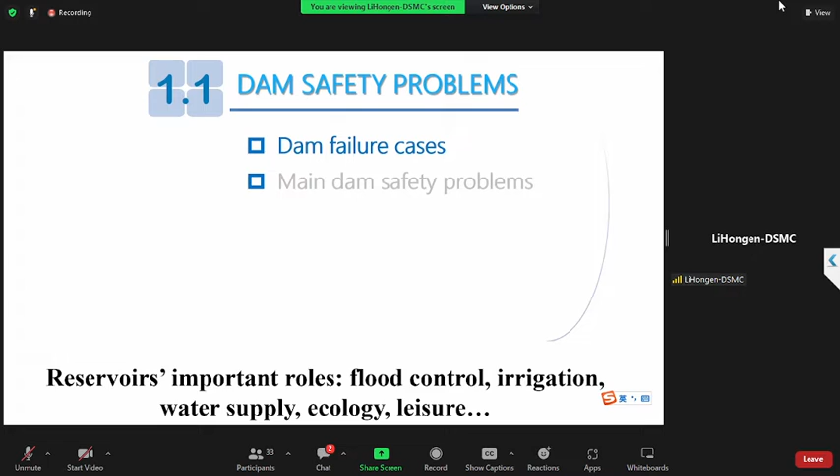We all know dams or reservoirs are very important for every country, for people, for economics. But when dam failure happens, it may lead to serious consequences. So in the first part, I'll show you some dam failure cases that happened in recent years. This slide shows you some functions of reservoirs in China and also worldwide. Reservoirs play very important roles in flood control, irrigation, water supply, ecology, and so forth. But sometimes when dam failure happens, the consequences are serious.

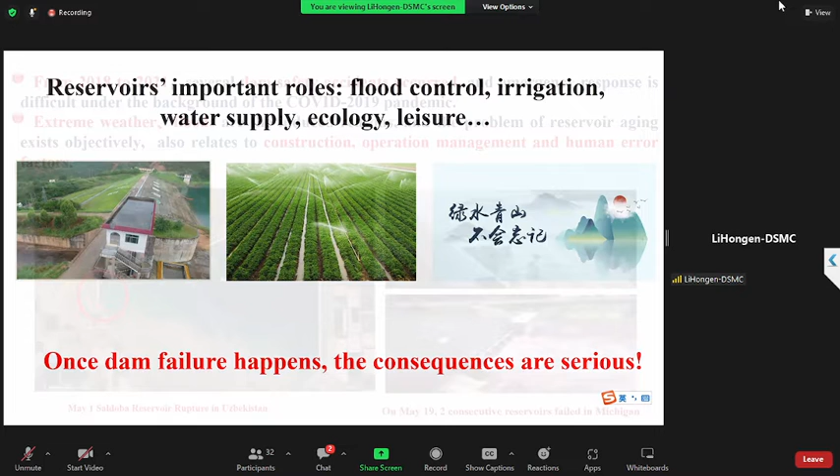From the year 2018 up to today, several dam safety accidents happened, and the emergency response is difficult under the background of this pandemic. Extreme weather, climate change, floods, and rainstorms are the induced reasons. And the problem of reservoir aging exists objectively, also related to some other reasons, such as construction quality, operation management error, and human error factors.

The first one I want to show you is, sorry, this case. This case happened on Hawaii island in the Pacific. This dam's name is Kaupakalua, failed by overtopping on March the 8th, 2021. According to the local media, 2 people were lost in the flood that day. One of them was rescued. The character of this failure case is that the dam is very old. It was built in 1885, and it is 17.4 meters high and 122 meters long. The residents downstream of the dam have been warned to evacuate.

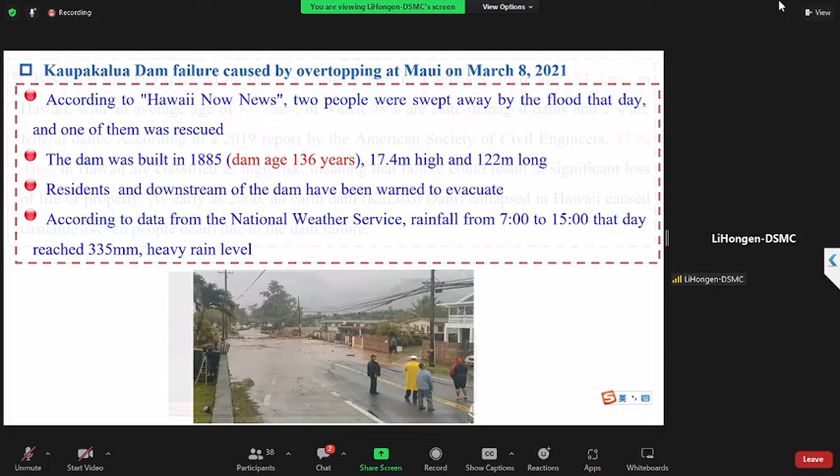According to the 2019 report by the American Society of Civil Engineers, 93% of dams in Hawaii are classified as high risk, meaning that failure could result in significant loss of life or property. And earlier, in 2006, another dam, Kaloko Dam, collapsed in Hawaii and caused casualties. 7 people died due to the dam failure. So we can see dam failure may cause people to die and cause a lot of influence to the local area.

Another case happened in India. The rupture of the Nanda Devi Glacier in the Indian Himalaya led to a dam failure on February the 7th, 2021. And more than 150 people died or disappeared during this accident.

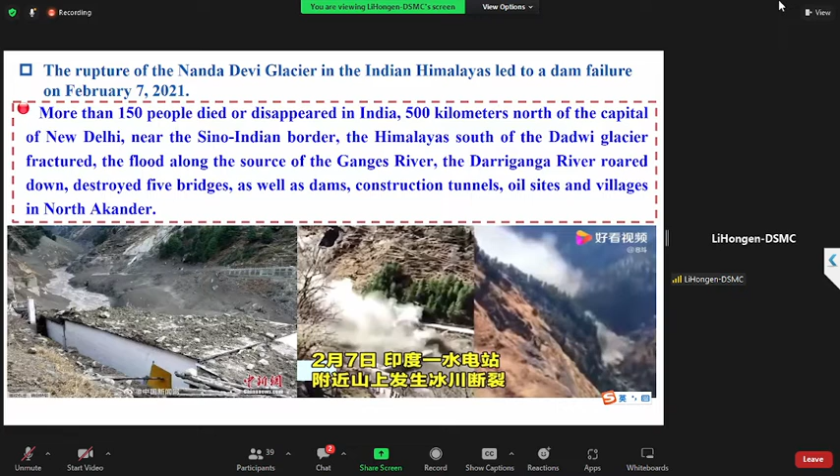Clearly, this dam failure case was caused by the climate change problem. So we check some background information. We know this is a neighborhood of China, the Himalaya area, and in this area flooding and landslides are prone to occur. In 2013, devastating floods occurred and led to more than 6,000 casualties. It's very terrible.

Another case happened in Uzbekistan in 2020, May the 1st. This reservoir's name is Sardoba. Maybe you heard of this accident. The dam is about 29 meters high and has a storage capacity of 920 million cubic meters. It's a very large reservoir. Based on the Chinese standards, it is a large 2 type reservoir.

Construction was completed in 2017. You see, it's a really young dam, very new. It completed construction in 2017, and 3 years later, it collapsed. The functions of the dam are irrigation and power generation. Clearly, the main function of this dam is to store as much water as possible.

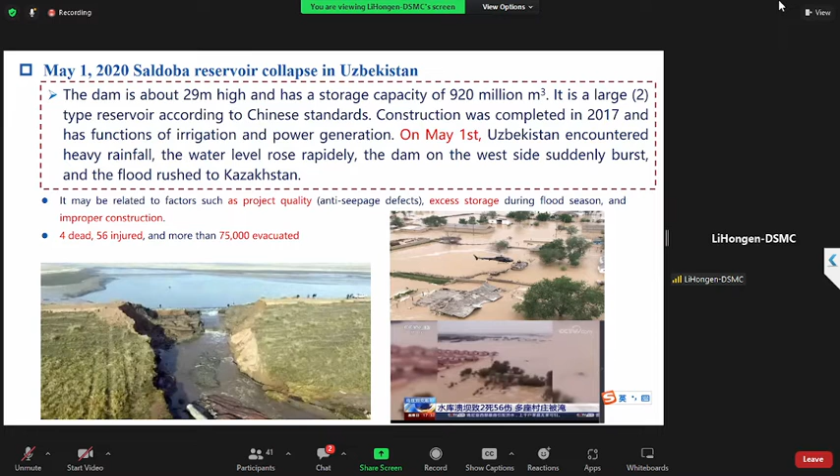This slide shows you some pictures from the dam failure site. You see the president arrived at the area rapidly. So you know this dam failure is very serious. Then I'll show you a short video to illustrate what happened when the seepage problem caused the dam failure.

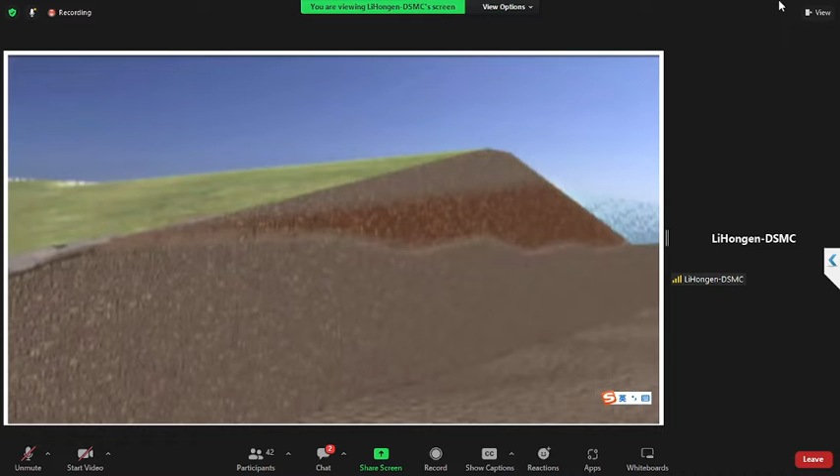One degree or another. While the dam experiencing seepage may appear in sound condition, there may be damage occurring to the internal structure of the dam. If seepage flow rates appear to be increasing and the flow is not clear and is carrying material, internal erosion or piping is likely occurring. Piping is an erosion process that occurs inside the dam whenever the seepage flow starts eroding embankment materials out of and away from the dam.

This starts at the downstream slope or toe and moves rapidly upstream to the impoundment. This process will tend to accelerate as the expanding larger opening or pipe allows for increased seepage flows. If left unattended, the seepage flow and progressive internal erosion will soon get out of control. When the internal pipe or void becomes large enough, the embankment structure above it will collapse. This will result in a failure of the dam's embankment and a potentially catastrophic release of the stored water, which may cause serious property damage and loss of life.

Okay, this video shows you the main process of dam failure caused by the seepage problem. So in the later part, we'll discuss some monitoring technologies for monitoring the seepage.

Next case is the Edenville and Sanford Dam failure in Michigan, United States in 2020. These 2 dams are also very old, built in 1924 on the mainstream of the Tittabawassee River. They are made for power generation and tourism. That day, due to continuous rainfall, the Edenville Dam in Michigan first collapsed, and then the floodwater washed away.

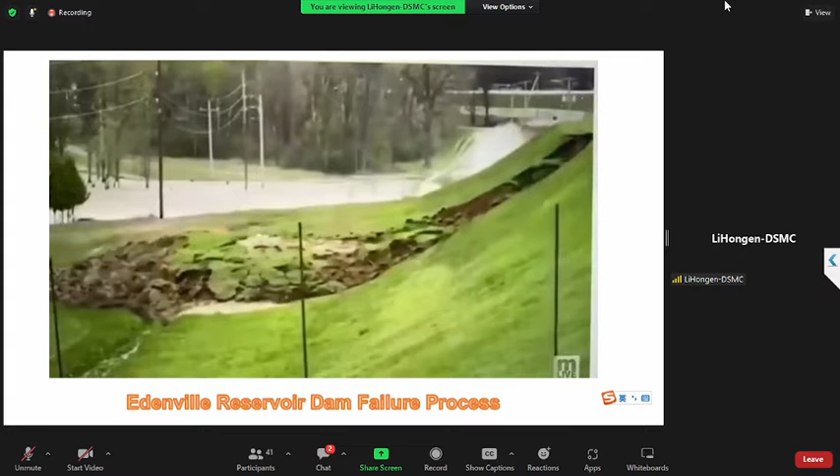So we check the files released by the local government. In 2018, the owner of the dam, Boyce Hydro, was suspended by the FERC and banned from generating electricity after the Edenville Dam was assessed as a high-risk dam due to its long-standing failure to solve the problem that we have mentioned, the inadequate spillway discharge capacity problem.

So the government asked the owner to realize the reservoir requirement that the discharge capacity should meet the PMF, probable maximum flood, but the actual discharge capacity was only 50% of this requirement. Interesting information is that when this problem was found, it was 1999, almost 20 years ago. However, nobody paid enough money or made enough assessment to fix this problem, and finally the dam collapsed. So every owner of a reservoir should pay attention to the maintenance of dams or reservoirs.

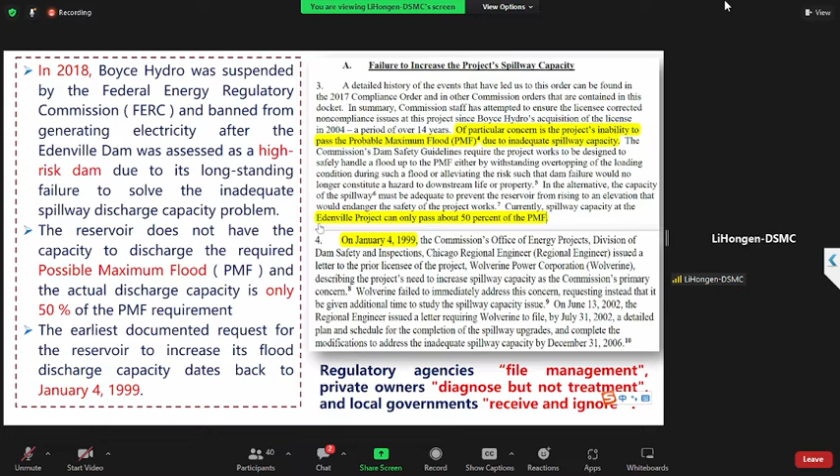But in this case, we have some lessons learned. Because of the better emergency response system in this area, rainfall forecast, and dam failure warning, nobody died. No casualties happened in this dam failure. So we know a good monitoring system and warning system is very important for dam safety management.

And then another case is this one, the Toddbrook Reservoir spillway accident in the United Kingdom, which happened in 2019. This is also a very old dam. Its age is nearly 180 years, and this dam is approximately 24 meters high. Also, heavy rainfall happened, and the water level rose sharply by 100 to 300 millimeters. On August the 1st, 2019, the auxiliary spillway of this dam was severely damaged due to heavy rain.

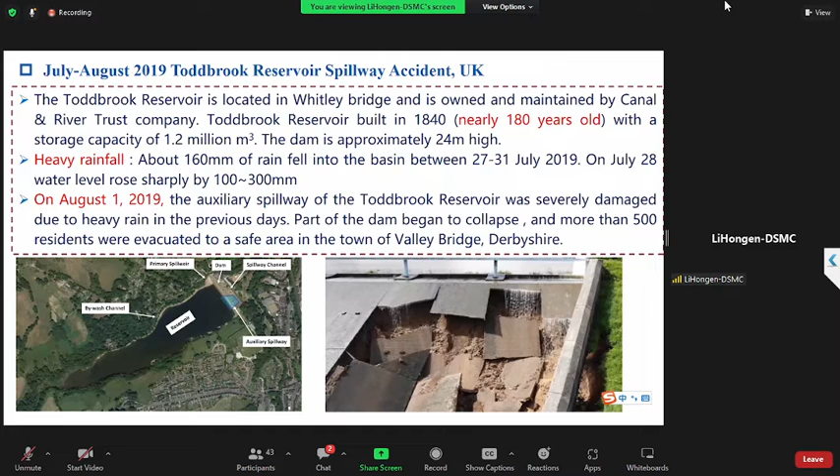Due to the emergency, the dam owner carried out several measures to lower the emergency. One is to use an emergency pumping operation. It effectively alleviates the impact of heavy rainfall on the dam. And the British Air Force helicopters dropped 1-ton sandbags at the spillway site, dropping a total of 530 tons of sand, and the ground personnel solidified these sandbags with concrete.

Some factors led to this accident. One is the design problem. You know, it's a very old dam, so the spillway is poorly designed and not strong enough to discharge the maximum possible flood. Another reason is management issues, like poor supervision, failure to reinforce in a timely manner, and some other maintenance work errors.

Another case is also a very famous dam incident. It's the Oroville Dam incident, a spillway problem, which happened in 2017. This dam is very important for the local area. It's the tallest dam in the United States, and it's very important for the local water supply. Due to the rain and the snow, the water level rose rapidly, and the owner used the spillway first, but a huge collapse area appeared in the spillway. The owner had to use the emergency spillway, which caused a lot of problems.

Dams are designed to store runoff resulting from heavy rain. When storage has reached a specific limit, spillways are designed to pass the excess floodwaters, initially through a primary spillway. Many dams are equipped with an emergency spillway to help pass large flood inflows which exceed the capacity of the primary spillway. In an extreme flood, flows can exceed the combined spillway capacity, spill over the top of the dam, and create a very dangerous situation. Overtopping flood flows can rapidly erode down into an earthen embankment dam, leading to an uncontrolled release of the stored waters and causing catastrophic flooding downstream.

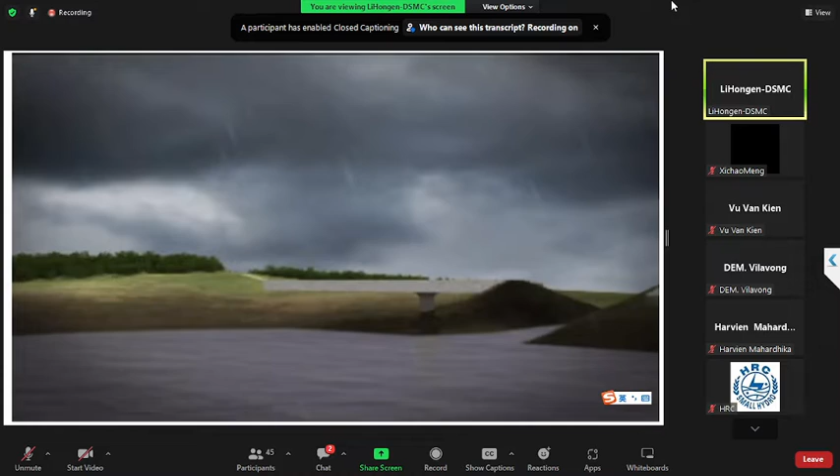Okay. The last dam failure case I want to show you is the Xe-Pian dam failure, which happened in 2018, and with this dam, people went missing and 9 people died. This dam failure happened on July the 25th, 2018. The dam collapsed, and 13 administrative villages were directly influenced or had to be evacuated to safe places.

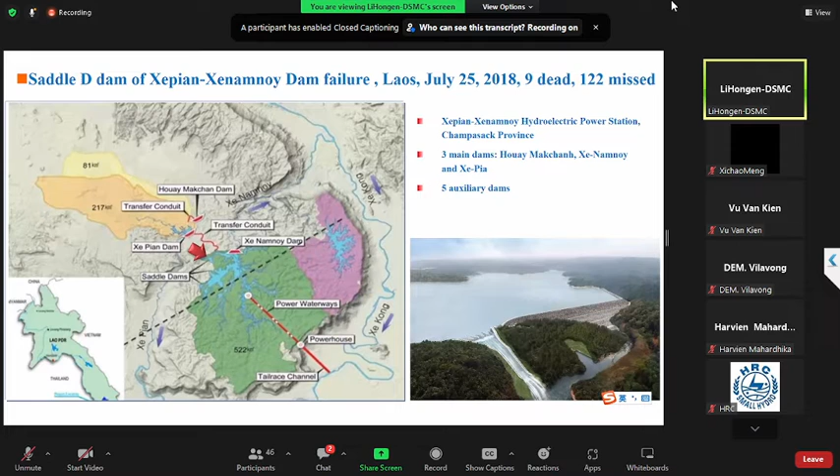And we checked some information about this dam failure. The owner of this dam is a Korean company, PNPC. On the 23rd of July 2018, they made an announcement to the downstream that over 5,000 million tons of water would flow out to the downstream of this river.

This day is 2 days before the disaster happened, but the local government didn't pay enough attention to this announcement, and no people were transferred to a safe area. So after the dam failure happened, a lot of people died. So this dam failure case tells us the warning of dam safety is very important to the public.

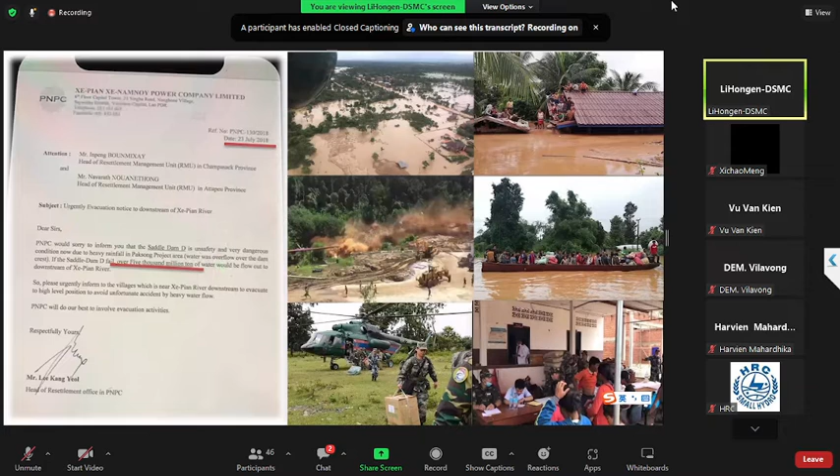After this dam failure happened, ICOLD, the International Commission on Large Dams, rapidly released a statement to the public. They told us dams are critical pieces of not only physical but also socioeconomic infrastructure that supply different functions. So like other large infrastructure in our societies, dams provide critical services, but also pose high risks that must be addressed during the planning, design, and construction phases.

The precautionary principle of dams to prevent and mitigate adverse downstream safety consequences informs and is the heart of this commission's mission, and also the mission of dam owners and local government. So we have discussed a lot of dam failure cases. Then we make a short summary of what the main dam safety problems are.

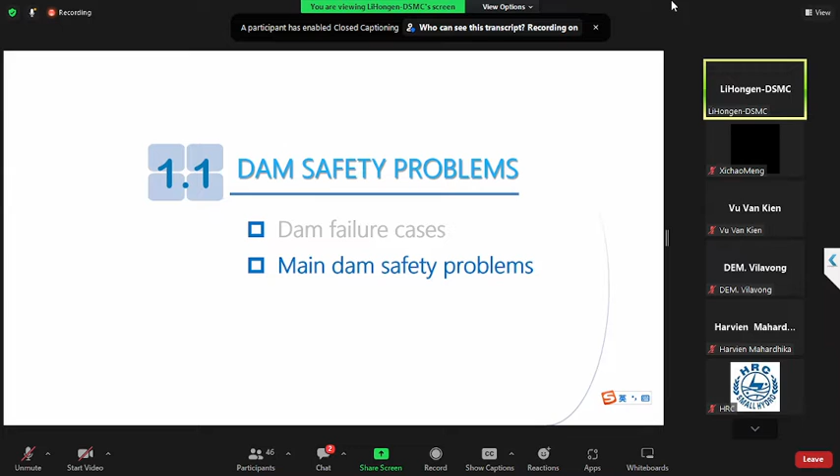Normally, I want to take the rockfill dam, for example. For this kind of dam, the first dam safety problem is the flood prevention problem. We know most of us build a reservoir to realize the flood control function. So like the Edenville Dam, like other dam failures, this problem has several characteristics.

One is because of insufficient rainfall, flood or river data, unreasonable design of flood standard sometimes happens. Second, encountering over-standard floods due to rainstorms, due to climate change. And then some rivers may face sedimentation problems, and this problem may lead to severe reduction in flood storage capacity.

The second problem is the seepage problem. Seepage is another very important reason. This problem may happen in the dam body or the foundation, and also may happen on the interface between dam body, foundation, and concrete structures like conduits, like spillways, and some seepage problems happen on the abutment.

And then the third problem is structural problems. This kind of problem can be summarized as dam cracks, partial collapse, dam body slide, abutment instability, dam foundation liquefaction induced by earthquake, and termites and other animal hazards. This is also a very important problem for rockfill dams. Okay.

Until now, we have discussed a lot of dam failures and dam problems. So how to monitor dam safety status by proper methods? Here, we'll discuss a lot about this in this section. So the purpose of dam safety monitoring can be summarized as during the construction period, the operation period, and for scientific research.

So first, during the construction period, monitoring data can be used to check the reliability of the design and the quality of construction, and hence revise the design or change the construction scheme if necessary. This slide shows you some dam sites under construction.

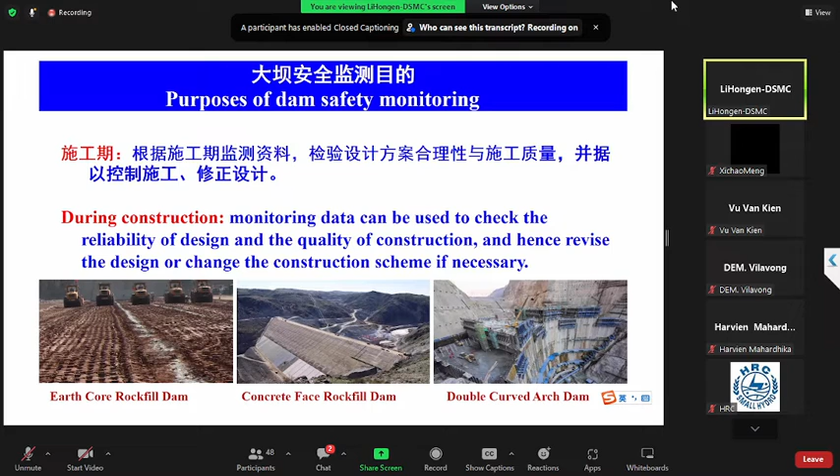During the operation period, the first-hand monitoring data can be used to analyze the safety status of dams and their potential risks. Measures can then be employed to ensure the long-term safety of dams if necessary. So dam safety monitoring technologies are very important during the operation period, especially for very large, important reservoirs.

And finally, for scientific research purposes, dam monitoring data provide the most valuable and reliable basis for the verification and improvement of theories in dam engineering. Imagine a real project like a 1:1 scale experiment, right? Its data is very important for the development of dam design and construction technologies.

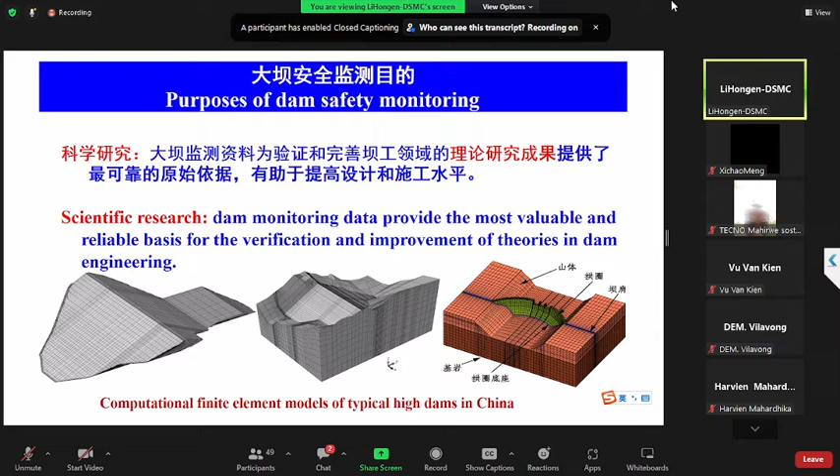So in China, there are rigorous requirements in dam safety monitoring by the Chinese government. We have different kinds of technical specifications for different types of dams, especially for rockfill dams, for concrete dams, and also for the monitoring system, how to realize this kind of system.

So we have finished the first section, the purpose of dam safety monitoring, and then let's discuss a little bit about technologies of dam safety monitoring. First, I want to show you the characteristics of dam monitoring. We know dam safety monitoring includes dams, their foundations, abutments, and near-dam slopes, and they all have a major impact on dam safety, and other buildings and equipment that are directly related to dam safety.

All these objects should be monitored. Its characteristics are expressed in the following aspects. It's a life cycle problem. We mean during the construction period, the operation period, and also the retirement period, we need dam safety monitoring. It's a dynamic and not static process. It also involves relevant items. It covers a very great range. That means not only the dam itself, but also the facilities and structures related to the dam.

So I'll show you the load diagram of a certain gravity dam. We know there are different kinds of loads, and to these loads the dam should have some response: pressure, seepage, uplift pressure and sediment pressure. When an earthquake happens, there is an inertia response. All these responses we should monitor. But different dams have different requirements.

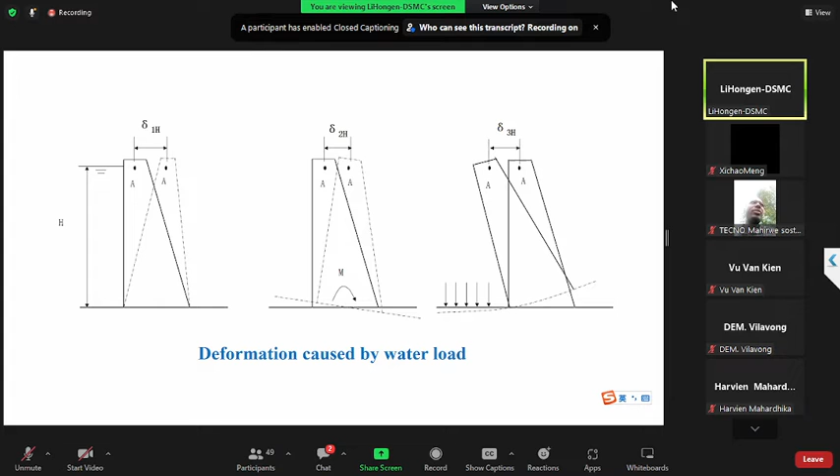So several common concepts, like detection. Detection normally means short term. Monitoring means long term. Observation means surface artificial methods. And monitoring and controlling means we monitor the data, realize the analysis, and then feed back to the decision.

And health monitoring means structure and damage diagnosis, detection, risk analysis for the structure, for the probability of the failure and also the consequences of the failure. We multiply these two factors to realize the risk analysis. And another concept is the safety assessment. This means we should evaluate the safety status of a dam.

And back analysis means we use monitoring data to carry out the back analysis and to calibrate the material parameters. And we use these parameters to make another analysis and then to evaluate the safety status. It's a bit of a complicated process.

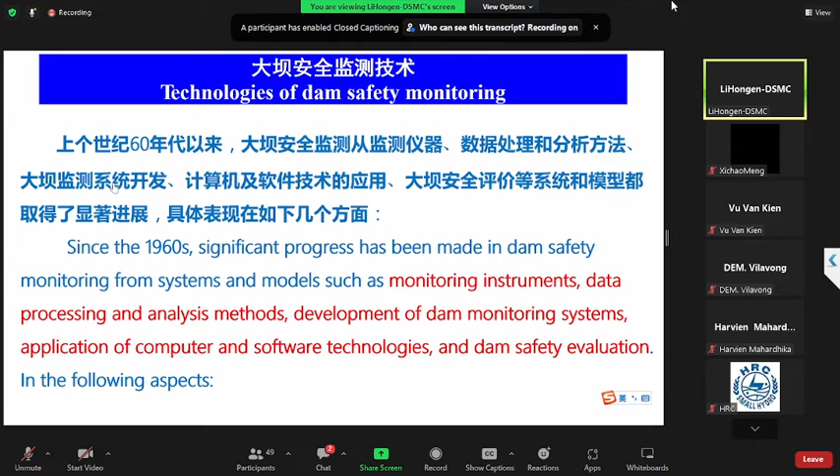The first one is sensors, different kinds of monitoring instruments. After we finish the placement of instruments on the dam body, we have to gather the data. So the second one is the data acquisition system. And then we have a dramatic amount of data to analyze, so we need an information management system. And finally, we should have mathematical methods, like different kinds of data analysis methods. So these 4 parts are the very basic aspects of dam safety monitoring technologies.

Okay. So the first part is monitoring instruments. Normally, when we talk about monitoring items, we have different aspects. The first one is manual inspection, and then deformation, seepage, stress strain, temperature, environmental quantity, and others. Manual inspections also need instruments, very simple instruments such as rulers. But this is very important, especially during the emergency period of flood season. Manual inspection is very, very important.

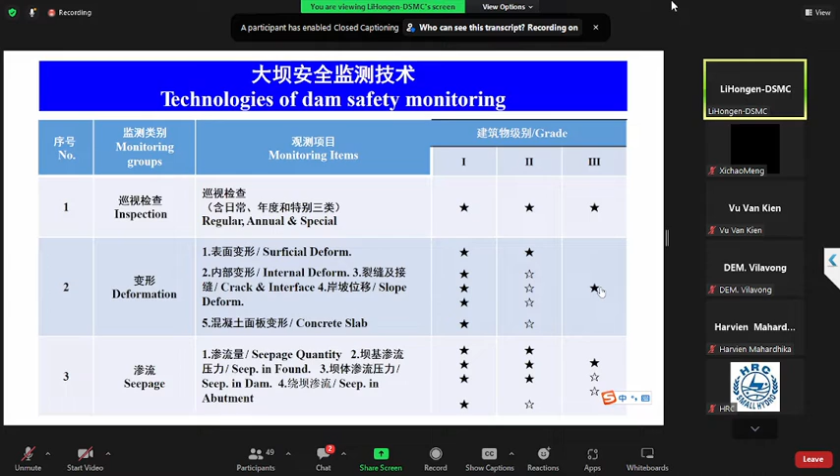For pressure and stress, we have pore pressure, earth pressure, contact pressure, and concrete slab. And for hydrology and meteorology, reservoir level is very important. Precipitation, rainstorm, rainfall very important. Others like water temperature and reservoir wave are less used. But sediment is very important. Ice is very important for some dams and reservoirs located in the north. Earthquake is also very important.

So for manual inspection, we have some requirements. For personnel requirements, the engineers carrying out the manual inspection should be trained properly. They should have sufficient experience. Relatively fixed people; you cannot change to different people to do this. For monitoring data requirements, we should record properly and contrast results from different times. For route requirements, there should be successive and reasonable routes. For time requirements, it should be planned and consistent. And the last one is the requirement for results processing and inspection.

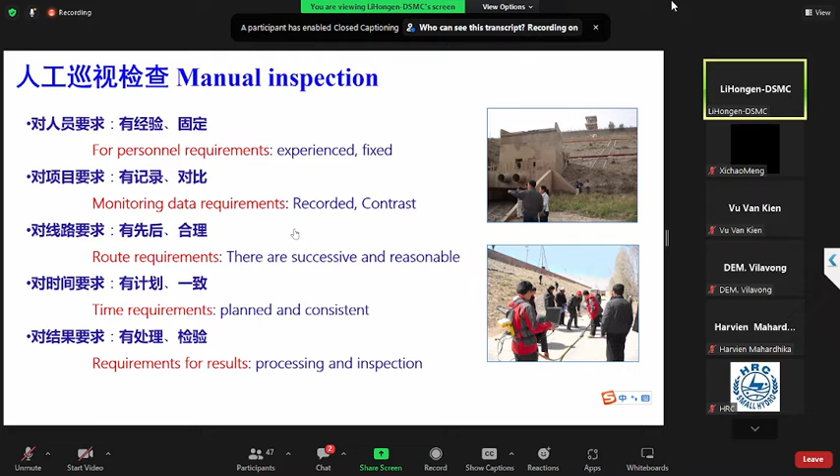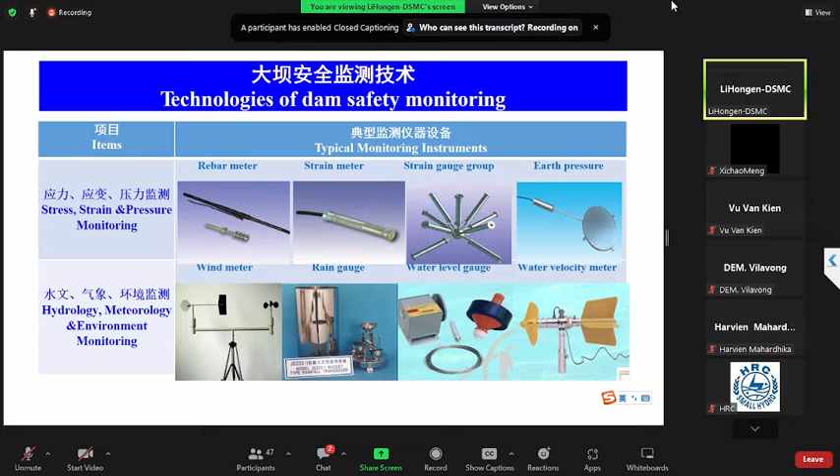And for the environmental monitoring, we have different kinds of meters for wind, for rainfall, and water velocity meter for water velocity. So let's discuss a little bit in detail on the environmental monitoring. For water level, the manual reading can be done with the water level gauge, or different types of water level gauge can be used for automatic measurements.

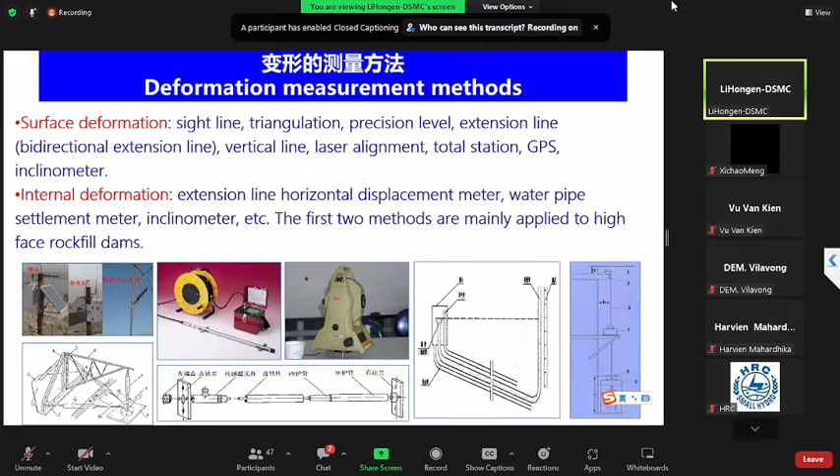And for deformation measurement methods, for surface deformation, we have sightline, triangulation, precision level, extension line, vertical line, laser alignment, total station, GPS or GNSS, implementing different kinds of technologies. And for internal deformation, we also have these kinds of meters. So the extension line horizontal displacement meter and water pipe settlement meter are mainly applied to very high rockfill dams, or concrete face rockfill dams.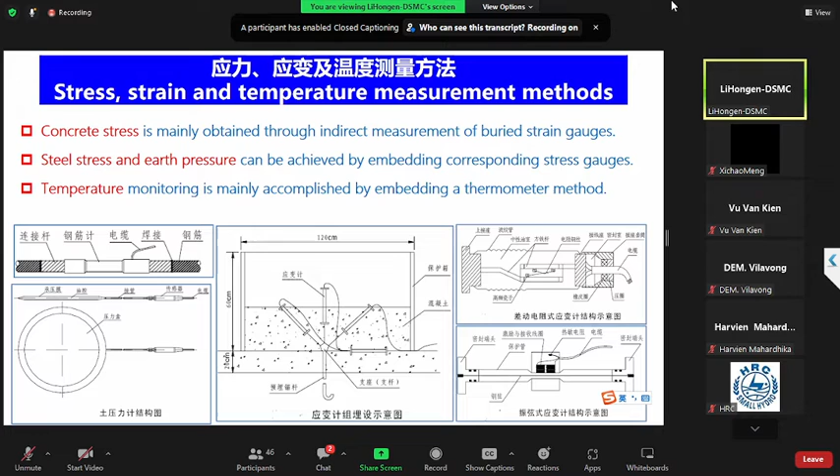And then for stress, strain, and temperature measurement methods, we normally use different strain or stress gauges to realize concrete stress, steel stress, and earth pressure monitoring. Normally during the construction period, these are very important. Especially, temperature monitoring is very important for concrete dams. Proper controlling measures should be made to lower the probability of cracks in concrete dams. This is very important.

And others mainly discuss earthquake and hydraulics. We know an earthquake is a sudden load on the dam body, so we should know the response of the dam. This is very important. We have proper sensors. And hydraulics means we should know the flow state, especially on the spillway. Just now we discussed the Oroville incident. We should know the flow rate and the surface line and erosion, vibration. This also can be monitored by proper methods and instruments.

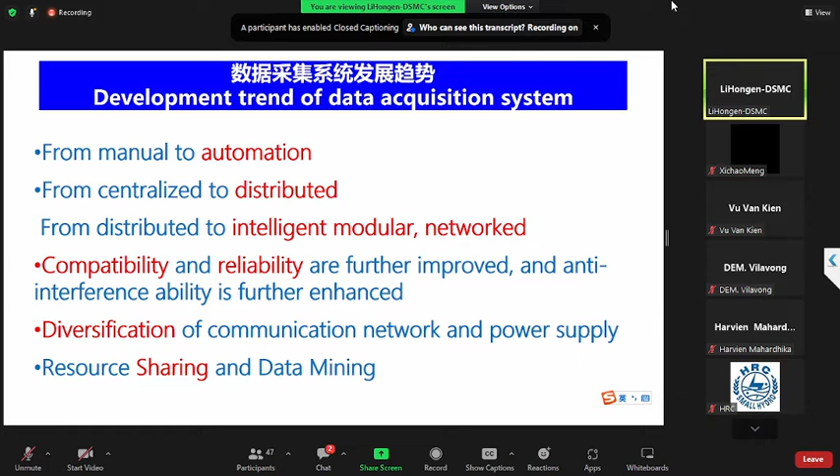Okay, and the second part is the data acquisition system. This is also very important. The development trend of data acquisition systems right now is from manual to automation. Clearly, most of them right now realize data acquisition automatically, and from centralized to distributed, from distributed to intelligent modular, networked, and also compatibility and reliability are very important for this kind of system. Diversification of communication network and power supply, and resource sharing and data mining are also very important.

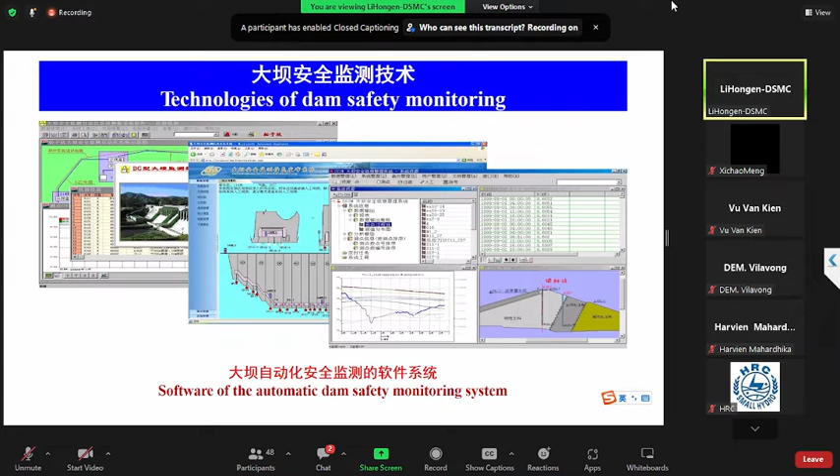And the third one is the information management system. In this system, right now we have data from the dam body, and we need to produce a lot of tables and time curves. We should use this kind of system. I'll show you a diagram. This is one diagram of this kind of system, and then we also use data analysis methods.

Clearly, for most of them we need some background in mathematics. So general interpolation, statistical theory and mathematical morphology are needed to realize the error analysis first, and then we have to use data modeling. So we need general probability and statistical models, deterministic and mixed models, GM models, and also others. Right now, the BP model is very popular, and neural networks are very popular for data analysis. Finally, sometimes we use different kinds in series, which means combination models.

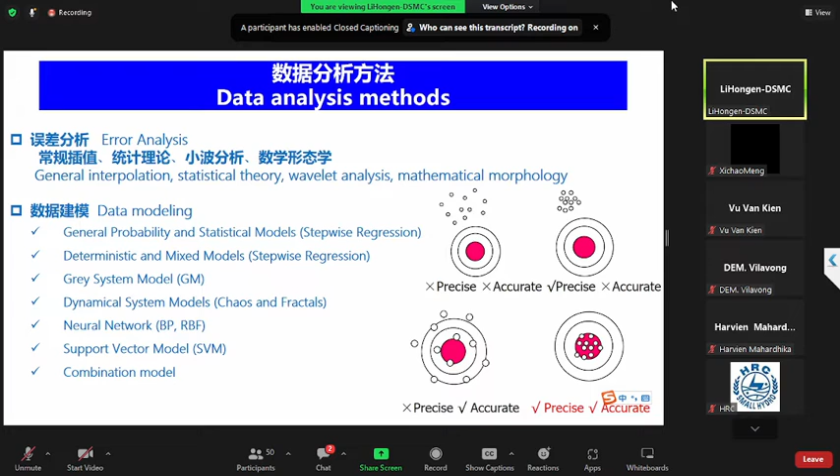Based on these models, we should know physical laws, yield criteria, and monitoring indicators. Also, trend analysis, correlation analysis, and component analysis are very important for dam safety monitoring. So this slide shows you a time curve of precipitation, rainfall, and temperature.

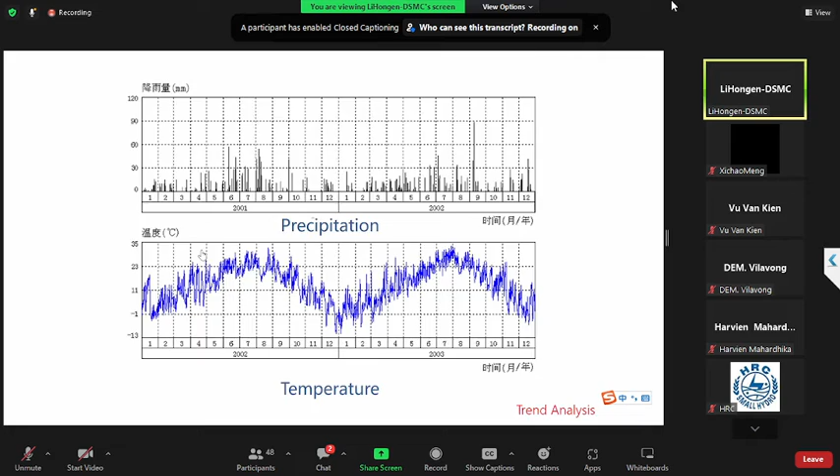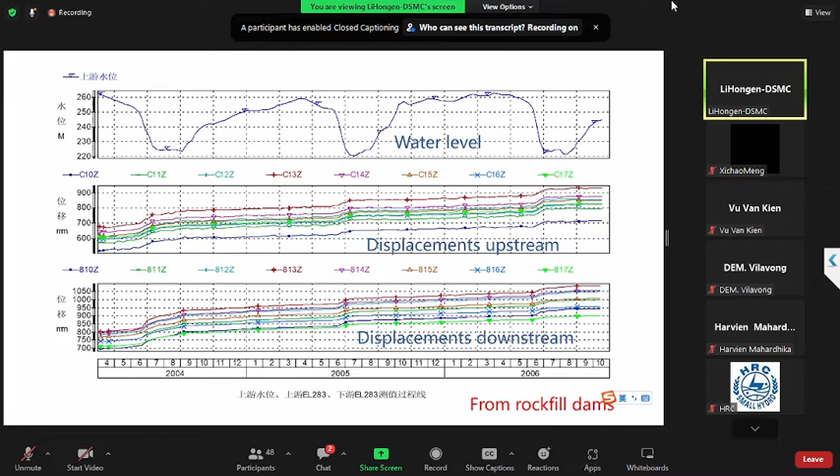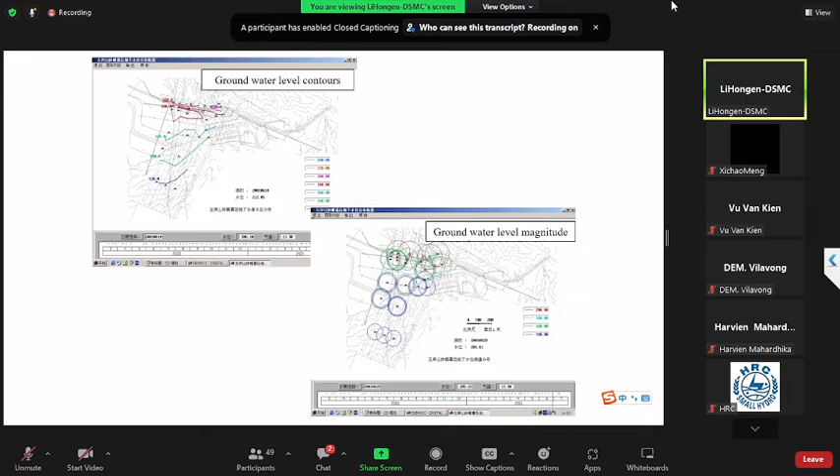Also, based on this system, we can realize contours, like groundwater level contours, and the groundwater level magnitude can be drawn in this system. Also, sediment distributions and sediment contours can be drawn automatically.

So we have discussed a lot of monitoring technologies, and in the last part we discuss a little bit of extra methods, like geophysical detecting methods for dam safety and reservoir management. I think other experts may show you this slide. Right now, there are almost 100,000 reservoirs in China, and most of them are old dams. Some of them have low construction standards and poor engineering quality. So risk and security problems are prominent, and flood control security is very important for us Chinese reservoir owners.

So just now I discussed the main different kinds of problems with dams. The most important one for rockfill dams is the seepage problem. This slide shows you dam foundation leakage, contact leakage, and detour leakage. So, typical safety hazards of seepage in earth dams, we have discussed a little bit, and how to detect them by detection methods, I'll show you on this slide. On the left part, we have discussed the safety monitoring instruments, but we also have detection methods like seismic, temperature, and sound electrical methods.

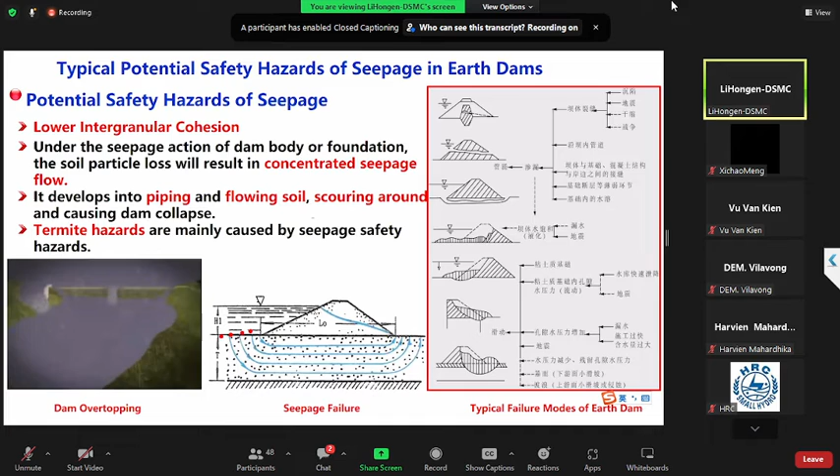Clearly, the direct inspection is the direct way. We have dry ground detection, with high accuracy, but this kind of method has a clear disadvantage: high cost, high impact, time consuming, labor intensive, and some reservoirs are not allowed to be emptied, especially for water supply. Then we have diver inspection. It also has high precision, flexibility, and a wide application range. But the disadvantages are that diving depth is less than 60 meters, with high labor intensity, limited working time, and a certain risk.

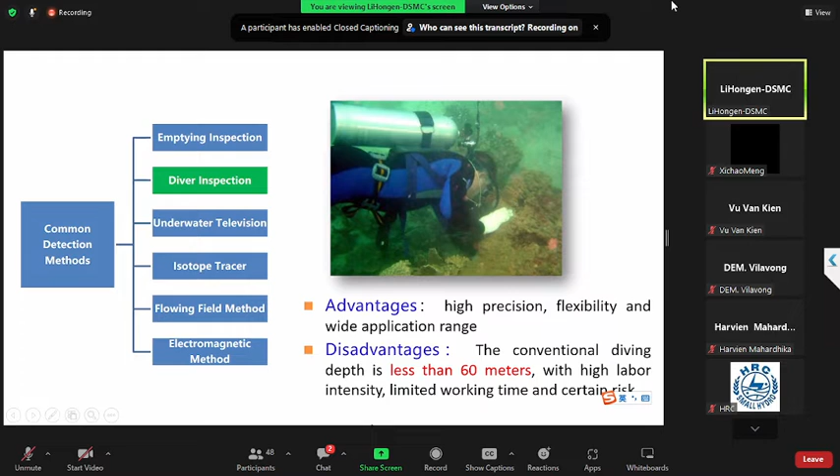And so for recent technologies, right now we have different kinds of machines, like this underwater television. Clearly, it's much more flexible and easy to operate. But the disadvantage is that only structure surface defects can be checked, not the leakage velocity. Then we have isotope tracer. This kind tracks the leakage point and the leakage passage accurately. Environmental pollution and drilling damage of the dam structure are its disadvantages.

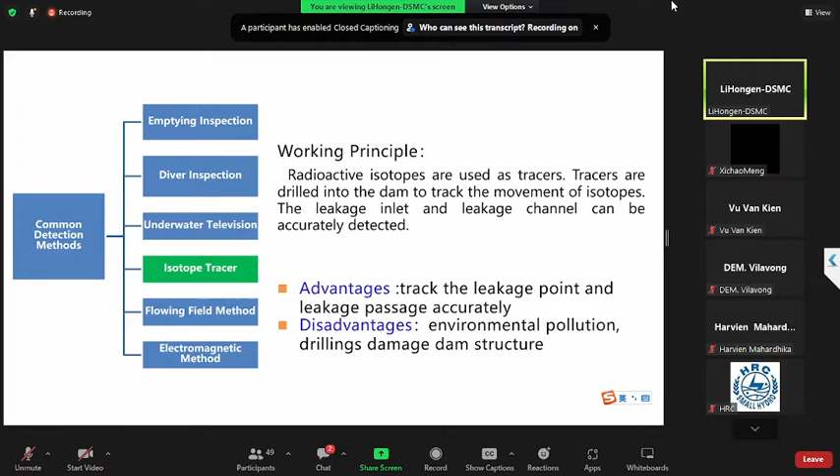And the flowing field method: its advantages are high resolution and strong anti-interference ability, but its disadvantage is it is only suitable for dikes or homogeneous earth dams and has fewer success cases for composite dams. And last is the electromagnetic method. There are a lot of methods in this area. It's low cost, high resolution, high efficiency, and easy operation. But the disadvantages are large signal intensity attenuation and limited measurement depth. So new breakthroughs in leakage detection technologies are urgently needed.

We have discussed two sections, and the last two sections are cases and advancement.

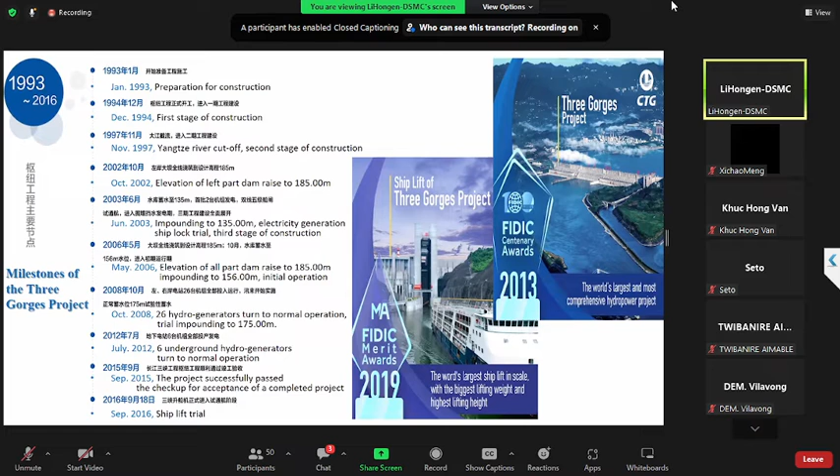This picture I photographed several years ago from the upstream of the reservoir, and this is another side view of this dam. I want to show you the case that is a part of the monitoring system. That is the ship lock, the Three Gorges permanent ship lock monitoring system.

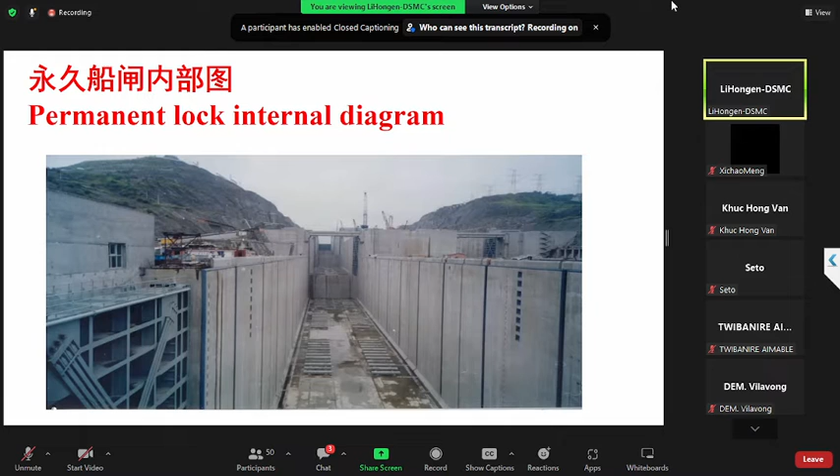What we have done, we see the permanent lock internal diagram. These are some pictures. It has five levels, five sections of this whole ship lock. So we installed a lot of measurement controlling units to collect the data from lots of sensors, and also this picture shows you the MCU installed in the permanent ship lock of the project.

And these cables connect a lot of sensors, such as deformation, seepage, and other kinds of stress, temperature, different kinds of sensors.

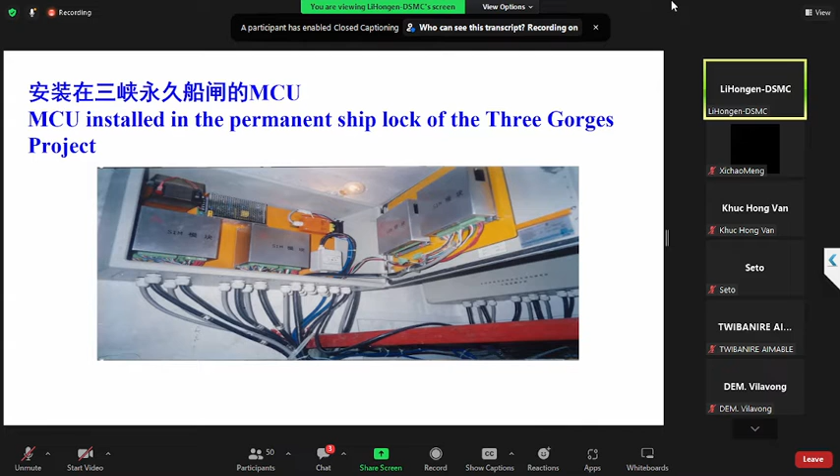The second case is the Gezhouba Erjiang sluice gate. It is believed that it's China's first distributed dam safety automatic monitoring system. Clearly, it's old. It's like the 1990s we installed this system on this dam. And another one is the Chencun Dam. It's also this case. It's a little bit old, 1990s.

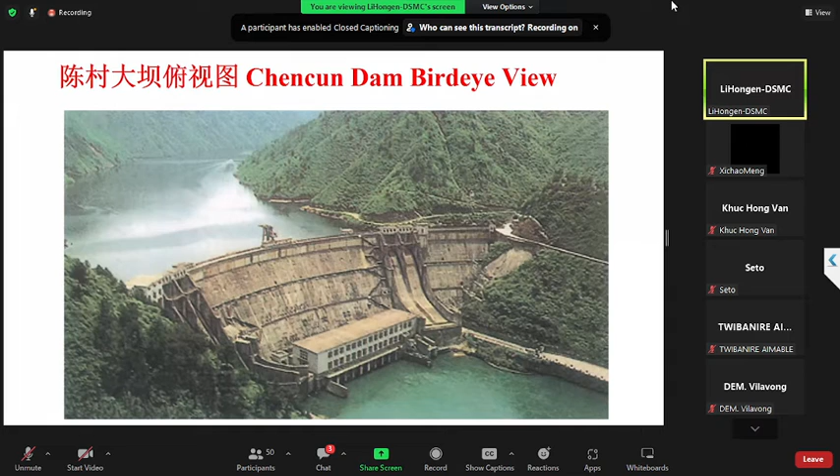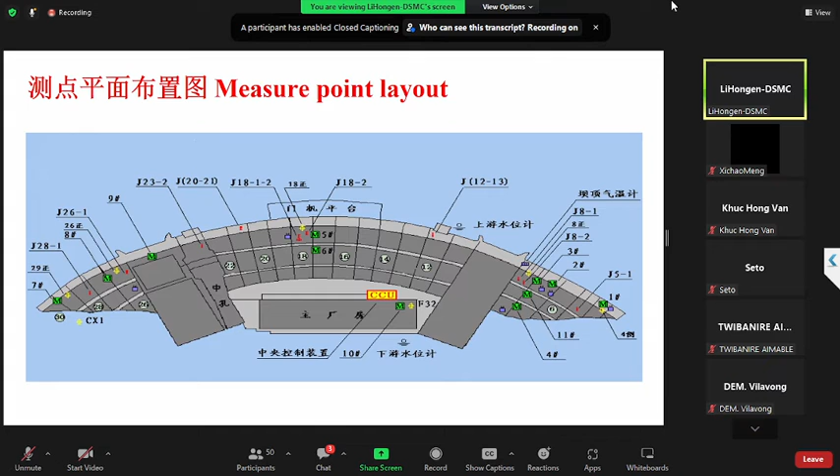And after some milestone projects, we pay more attention to some recent cases. The first one is right now the highest concrete face rockfill dam. It's Shuibuya, a concrete face rockfill dam. Its height is 233 meters. For this kind of dam we should know the real deformation during the construction period, and also the impounding period. This is very important. We should know the deformation, also the superficial deformation and the internal deformation.

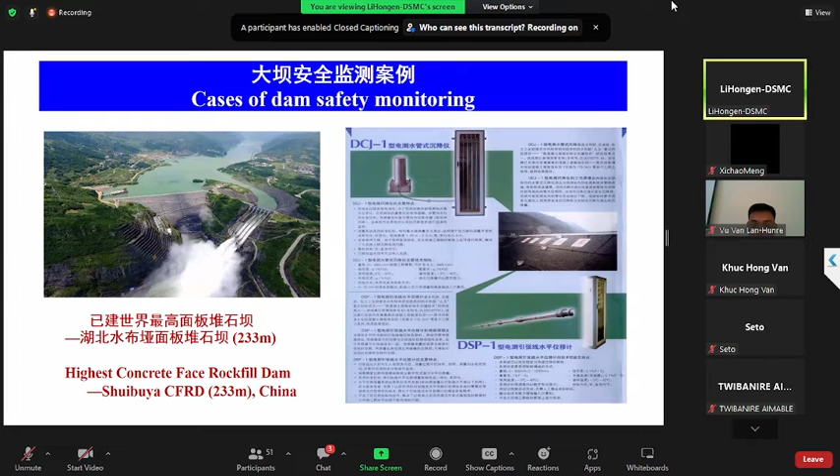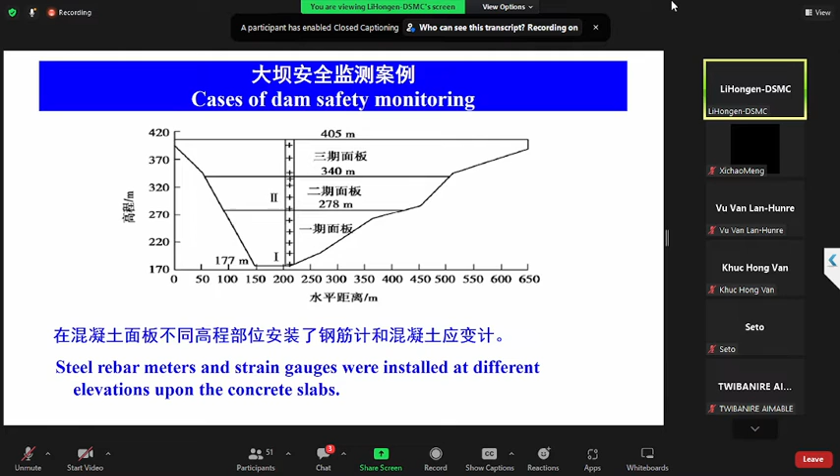And the steel rebar meters and strain gauges were installed at different elevations upon the concrete slabs. We know the cracks of the face should be controlled to guarantee the anti-seepage system. So we should monitor the deformation of the concrete face. Here, the recorded stresses of rebar can be used to analyze the effects of construction, water load, and the temperature on the slab stresses.

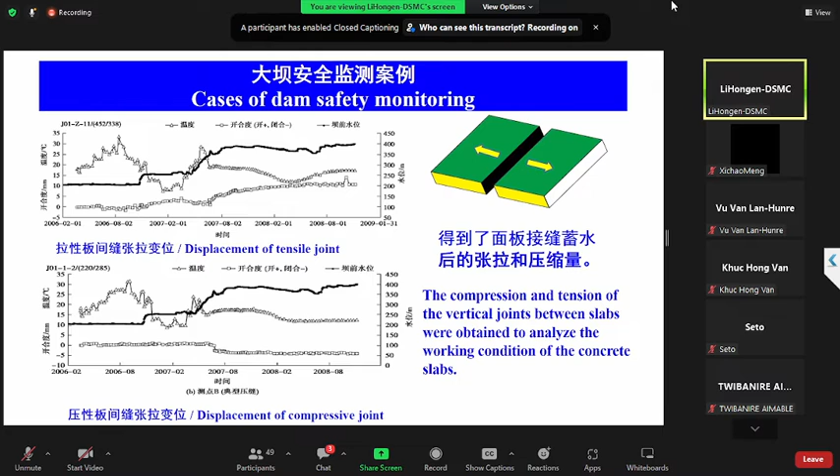The second recent case is the highest constructed earth core rockfill dam. It's Nuozhadu rockfill dam. Its height is 261.5 meters. But in fact, right now, another very high dam is under construction. It is Shuangjiangkou rockfill dam on the Daduhe River. Its height is 314 meters. It's still under construction, but this one has been constructed.

The Nuozhadu rockfill dam. Here, I show you the displacement monitoring points for the rockfill shell. The type of this dam is clearly different from the Shuibuya dam. It has a vertical central wall as an anti-seepage system. So this core wall is very, very important.

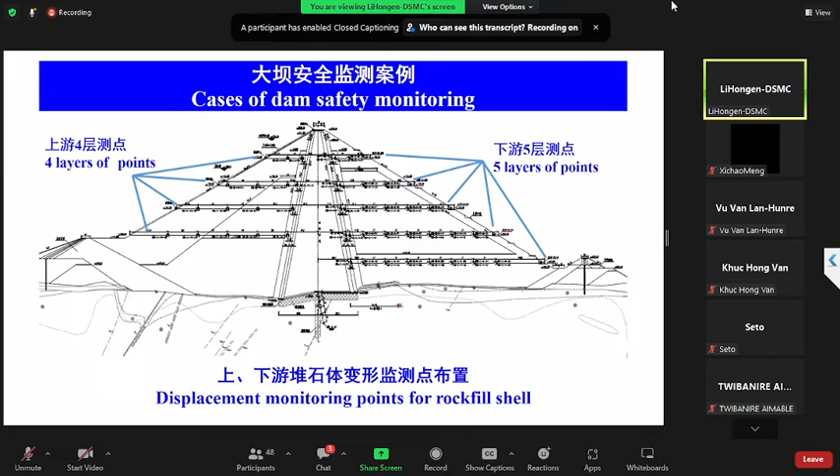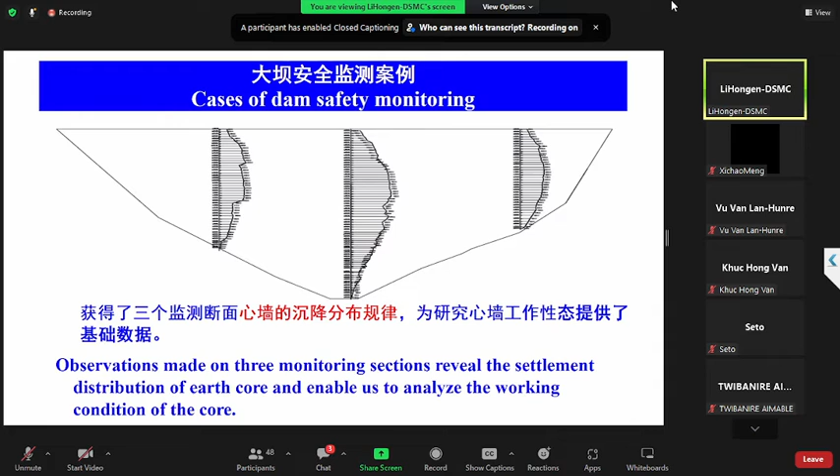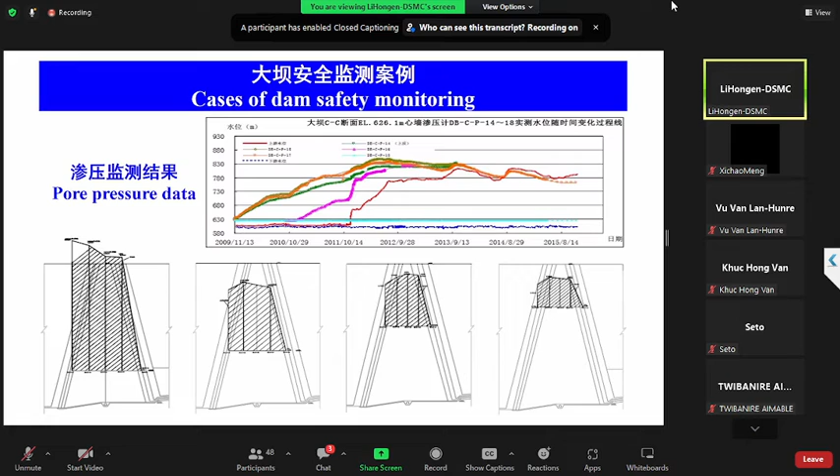And also we can guide the pore pressure data. We know for this kind of dam, the arch effect of the core wall sometimes happens. So from this result, we can see the arch effect is not very obvious in this dam. So this means the engineering construction of this dam is successful.

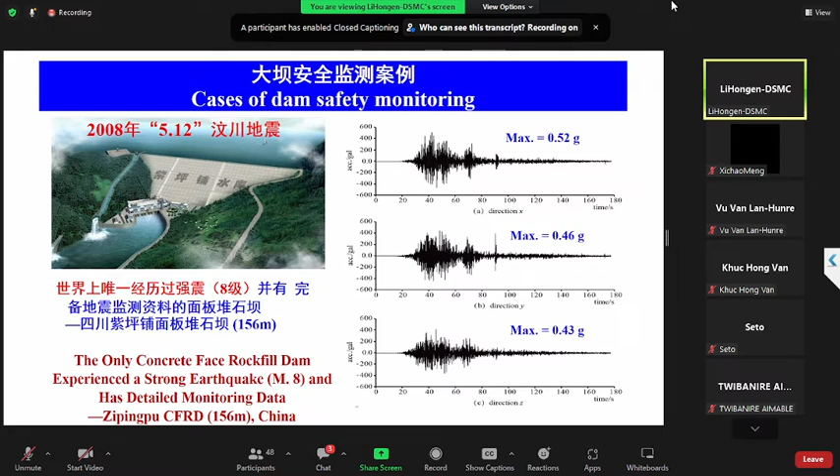Another one is a dam, a reservoir, which was subject to a very heavy earthquake. This is the only concrete face rockfill dam that experienced a very strong earthquake and has detailed monitoring data. It's Zipingpu rockfill dam in China, in Sichuan province. And what happened to this dam? In 2008, a very heavy earthquake happened, and the epicenter of the earthquake is very close to this dam.

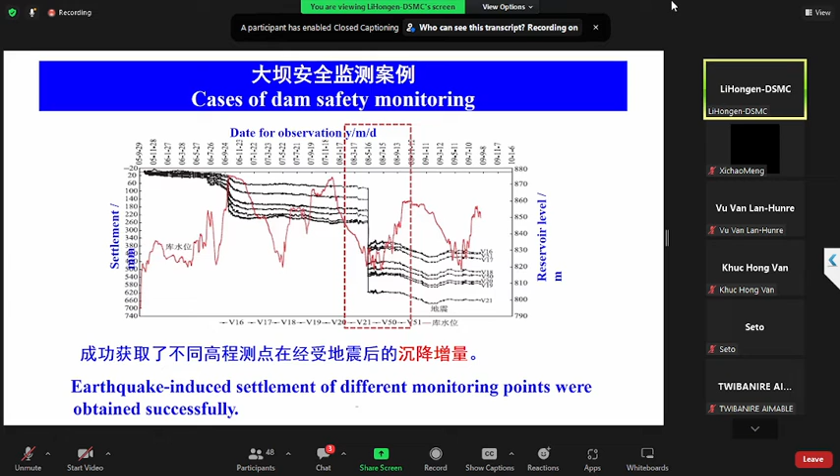So what happened? What we got? This slide shows you the earthquake-induced settlement of different monitoring points was obtained successfully. You see here, in this rectangle, you see the sharp increase of displacement during the earthquake. And the settlement distribution within the dam after the earthquake and the horizontal displacement within the dam after the earthquake are shown on this slide.

And the monitoring data show that the dam exhibits an overall contraction behavior during the earthquake. It clearly obeys the normal way of a rockfill dam after an earthquake.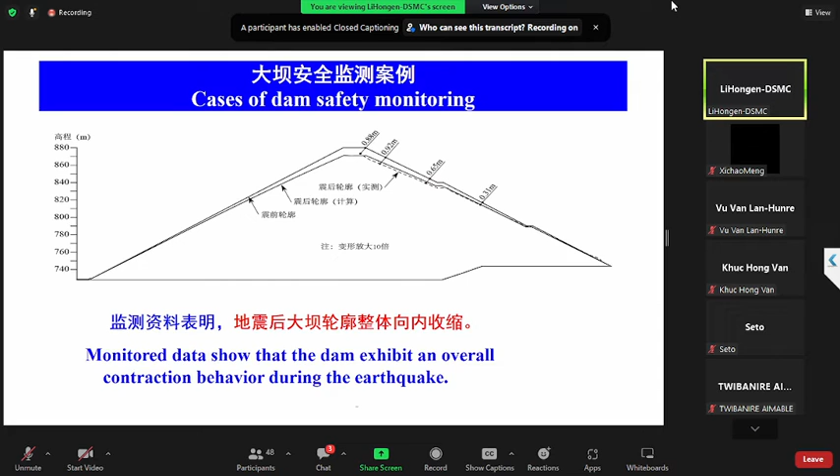So we discussed a lot of cases of dam safety monitoring and some cases of dam failure problems. Up to now we know dam safety monitoring is very important. We can get a lot of useful information from dams by this kind of technology. So what are the recent advancements in this area? So in the last section, we'll discuss a little bit on this topic.

So some new technologies. The first one I want to discuss with you is the fiber monitoring technology. This distributed optical fiber monitoring is typically used on dams, in the civil engineering area. I think it's very convenient and very useful.

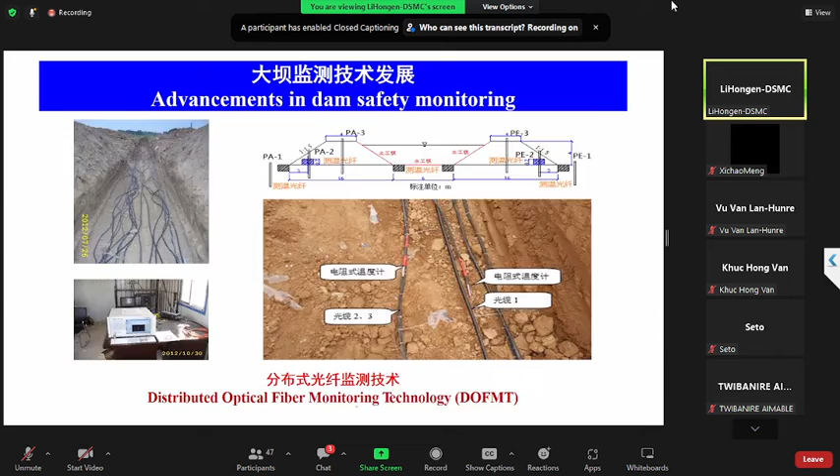Compared to the traditional ways, this kind of technology can realize continuous measurements of the deformation and the temperature, especially for rockfill dams and earth dams, and also for embankments. This technology is very convenient.

And other detectors, like ground penetrating radar, have very high precision and a wide range of flexible application. But the detection depth is limited. For this method, normally its limited depth is around 20 meters to 30 meters. For small dams, it's okay, but for large dams, it cannot detect sufficiently for the detection scale.

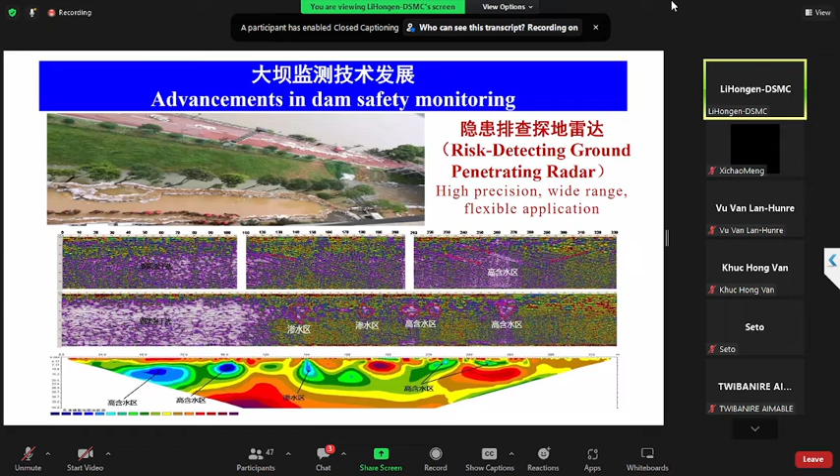And for large dams, another facility is very important. It's the robot with inclinometer. For some very high dams right now in China, we plan this method. We place this sensor system inside the dam body, and the robot deformation monitoring technology can be adapted to ultra high dams, the pipe length can reach 1,000 meters, in complex environments, with a high degree of automation.

It's good, but it's a little bit expensive. And this one is the GNSS we just mentioned, the Global Navigation Satellite System. That means we can realize deformation monitoring automatically by satellite.

We know right now different countries, different continents have their satellite system. Right now in China we have the Beidou system, and the United States has GPS. Europe has Galileo, and Russia has GLONASS.

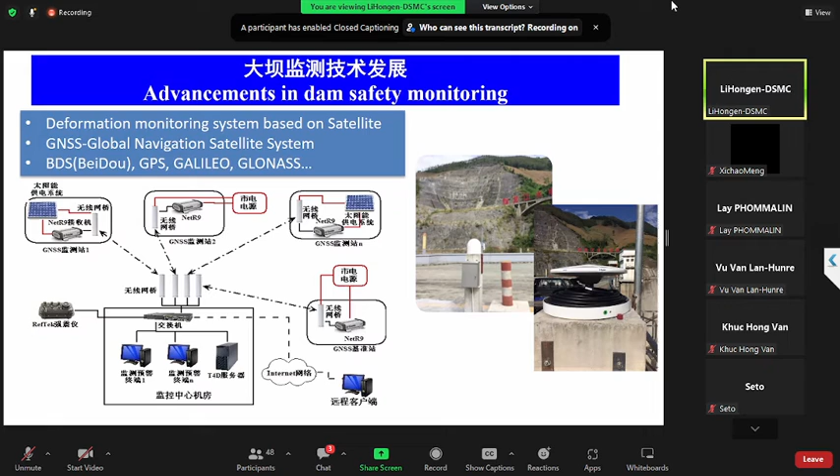And for us in China, a lot of dams, some small dams, have used this kind of monitoring method. And then I want to discuss a little bit the new generation of data collection system. Just now we used fibers, cables, to realize the data analysis system.

Traditionally, as I showed you, we can use 2G net or GPRS or 4G net or cables. But right now we have 5G. In recent years maybe we'll have 6G, and we have realized this technology. This can help us have a much more effective way to realize the data analysis system. So this slide shows you what the new generation of data collection system means.

That means we can have a cloud, we can use 4G or 5G internet, and also wireless net to realize sensor data collection. This is very important for large dams. The scale of the dam site is normally very large, so this data analysis system is effective and also economical.

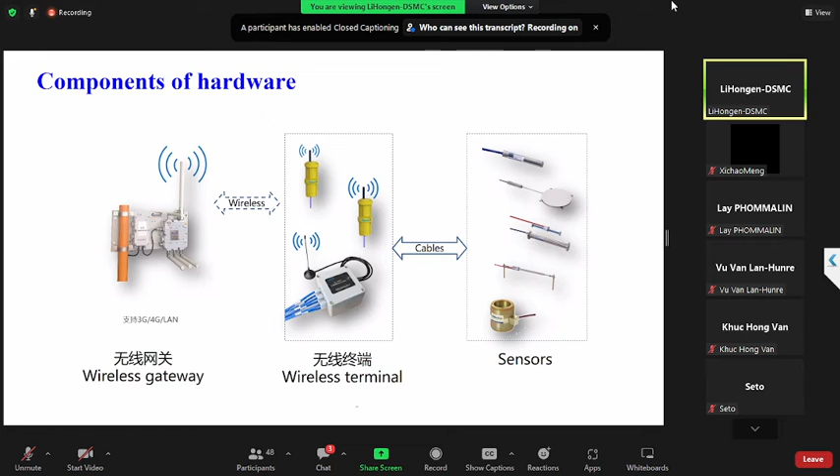So here I show you some components of the hardware. We have a wireless gateway, wireless terminals, and lots of sensors. The wireless terminal connects with the sensors, the data is transferred from the terminal to the gateway, and the gateway collects all the data and sends it to the center. For the data collection system, we can use a computer, cell phone apps, or professional terminals to collect the data. We have different ways.

Also, it's convenient. And then I want to discuss a little bit about the new decision-making and support system. We have a lot of data, but in fact the most important use of this data is to make decisions. So right now, for large rivers and large dams in China, we have this kind of rapid progress of emergency management technology.

On the left-hand side we have the information monitoring, including environment, the weather report, and also real-time sensors giving us a lot of data. Then we use the analysis system and prediction models to predict the dam's data and decide the next step, either forecast or warning.

That means how to open and close the sluice gates and the gates on the spillway, or how the flood goes downstream, and the area that may be influenced by the flood. So this is very important for the public. So right now we have used this kind of monitoring system, also based on the cloud platform.

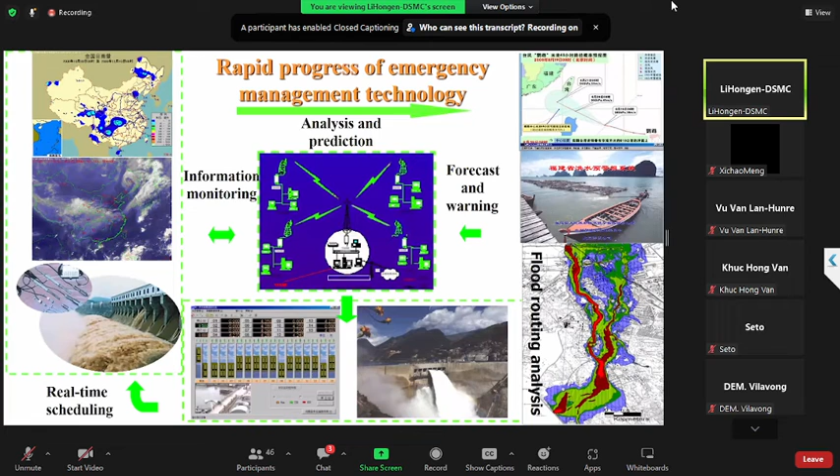This one shows you one province, Guangxi province. We use this platform to realize the functions just mentioned. In this system is the safety operation online auxiliary regulation system platform of more than 600 reservoir dams in this province. So you can check each dam based on one system, and it's a very efficient way to realize the management of one province.

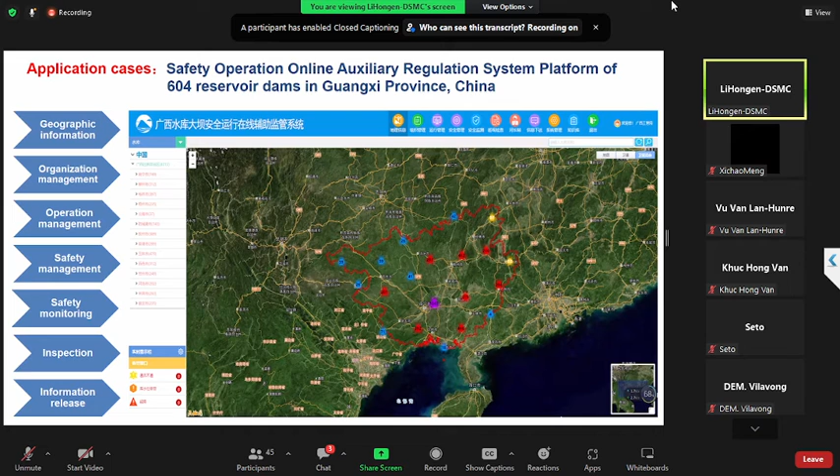Also, we have inspection apps, and the reports can be automatically exported for various purposes. Another platform is the National Dam Safety Monitoring and Supervision Platform for large reservoirs. This system is right now in our center. Its functions are comprehensive information service, safety management, surveillance, monitoring, warning and decision support. The data resources include 472 large reservoirs.

And right now, more than 17 large reservoirs from the central government and 50 large reservoirs of local governments have their safety management information, monitoring data, and other monitoring index information all connected to this platform. So this one platform realizes data recording, backup, transfer, web safety, and decision-making. It's a very large system for the leaders and the central government to realize dam safety management of these large dams.

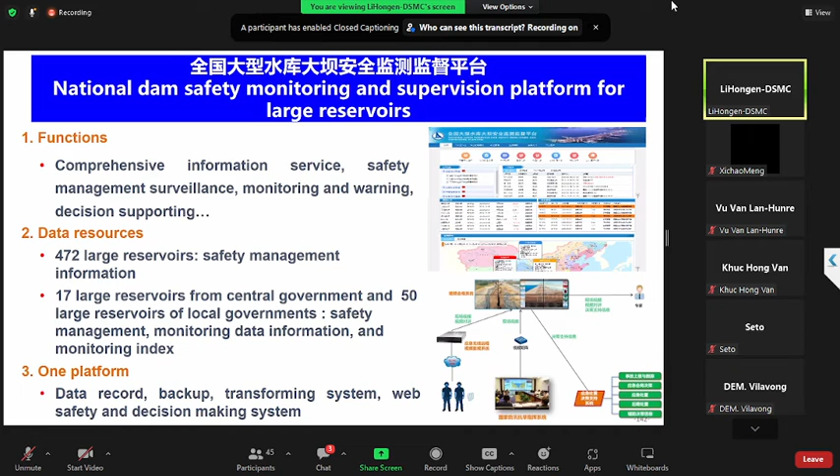This slide shows you some pictures of this system. So we discussed a lot today on dam failure cases and dam safety management technologies, and we discussed some monitoring cases and some recent developments. And last, I want to make short remarks on this lecture.

First, reservoirs and dams are indispensable infrastructures for social and economic growth of a country, and their safety is of significant importance. It's a background, I think. And then the safety monitoring is of irreplaceable value to control the construction quality, improve the design and understanding of the working performance of dams.

So in the area of dam safety management, we know we should have proper people, proper policy, proper methods, proper technology, and proper construction quality. In all of this, safety monitoring plays a very, very important role. We can imagine it's the eye of dam safety. How do we know the dam is healthy? We can make the decision by monitoring data and proper analysis. So this part is very important to dam safety management.

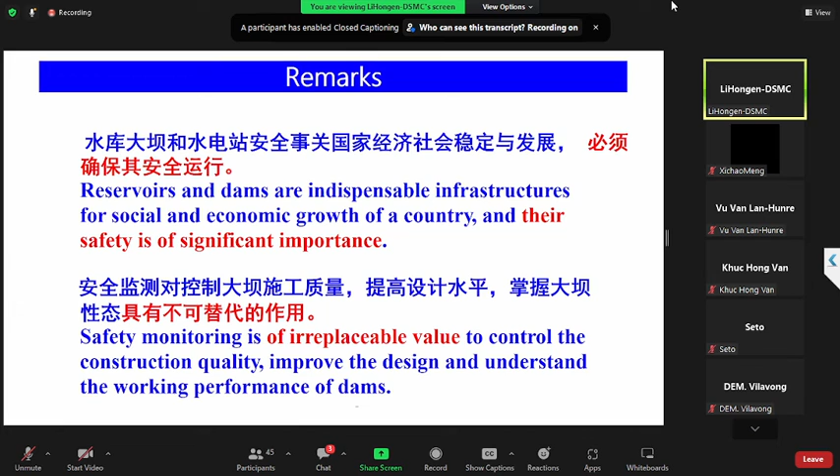Most of the decisions for directors, for leaders, are based on dam safety data, not others. We should have a solid basis for decisions, especially in an emergency period. And right now, development of modern monitoring technologies and their wide application provide a firm foundation to enhance their reliability continuously.

So for old dams and new dams, for the design period, construction period and operation period, proper and modern monitoring technologies should be used for dam construction. I think this is another very important aspect. And right now in China, in the recent 20 or 30 years, we accumulated a lot of experience. So we are very, very willing to carry out cooperation and exchanges with international partners, especially you today. We can make different kinds of cooperation in different ways.

So that's all. It's my presentation. The time is limited, and I hope one day we can discuss this topic face to face in future days. Okay, that's all. Thank you very much.